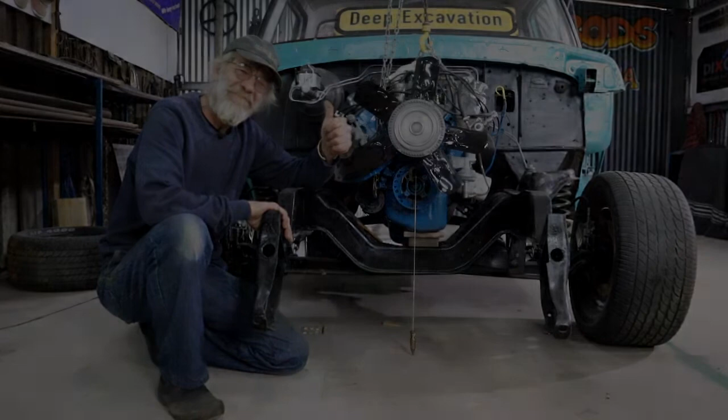Thanks for joining us. So in my previous video, I was establishing all these lines on the floor, reference lines, so that I could measure for proper engine alignment. Today, I would like to conclude that exercise so I can build my engine mounting brackets. I do need to ensure that my U-joint angles are within acceptable limits. So we'll be looking at that as well.

You might hear a little bit of rain on my roof. It's actually quite cold today. It's very strange weather for this time of the year. But nevertheless, I've got lots of energy, so let's get going.

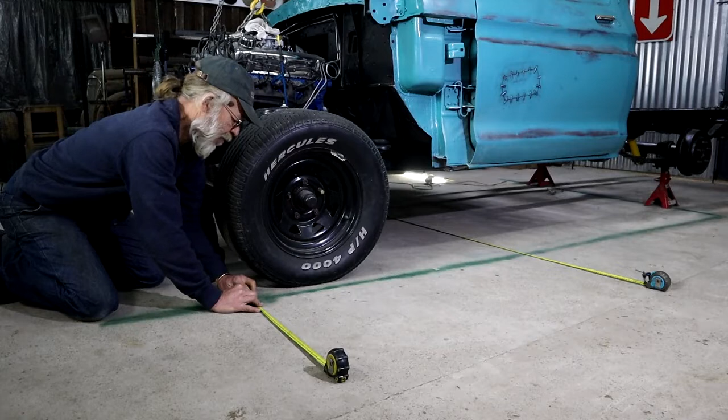Okay, and this one now measures 1101 millimeters. Yes, awesome. I've been crawling around on the floor for quite a bit now. Pushing the engine this way, pushing the engine that way, carrying on to get these two exactly the same. Tape measure in the back from the center line of the output shaft on the gearbox to my reference line. And then of course this one in the front from the center of the crankshaft also to my reference line.

I've now got these two measurements exactly the same. Whoopee. So that would mean that my engine center line is now parallel to my reference line. In case you're wondering, I did check these two tape measures against each other to make sure that they do read the same. You'll actually be quite amazed how tape measures can differ. They're not all to the same calibration. I mean, I've seen huge differences between tape measures. Back in the day when we used to build boats, we would all go to the shop together and then buy tape measures by checking them against each other so that we could all have the same measurements.

So with those two measurements the same, I now know that my engine center line is perpendicular to the axle. And I've currently got a gap here between the stock manifold and the steering box of about 6 millimeters, quarter of an inch. I do believe that's enough. If I ever want to change the stock manifold and go to a custom header, well then of course you can build it to suit.

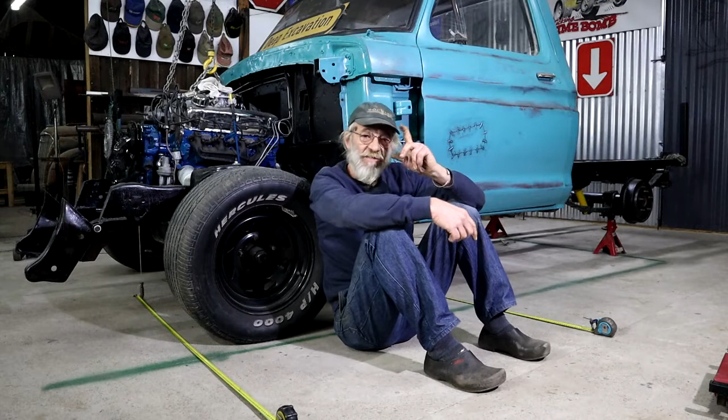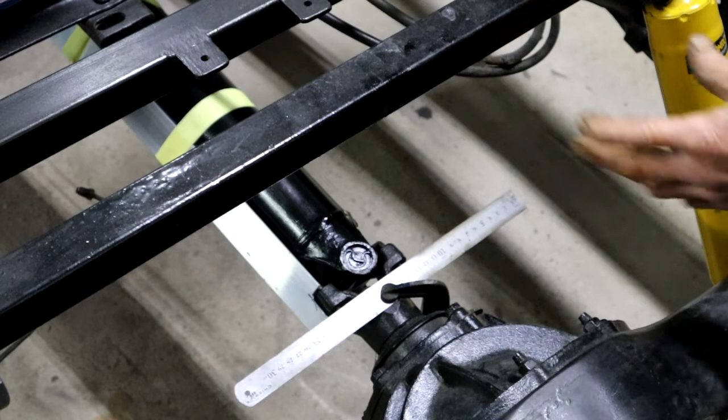Okay, so far so good, but now the golden question is this. What is the angle on the U-joint in the back? Is that within acceptable limits? So let's go and measure that. So yeah, it's a bit confusing with all the cross members, but hopefully you can see what I'm trying to show you. So I needed to establish some reference lines for myself so I can measure this angle on the U-joint. So the first thing I did was to clamp this piece of aluminium angle bar onto the prop shaft itself. In American, aluminium would be aluminum.

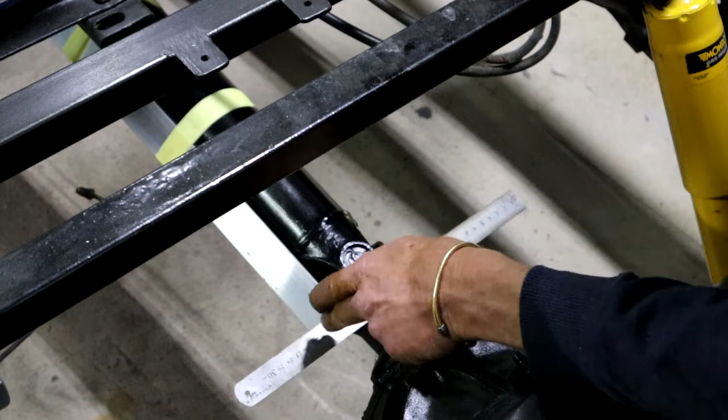So this gives me the line of the prop shaft. Then I clamped on this straight edge, the ruler here, onto the yoke. It is parallel to the machine surface itself. So now that I've got these two reference lines, I can measure the angle between them. So I've pulled out my trusty old protractor. Little bit rusty, little bit dirty, but it still does the job fine, just like me. So I'm going to now measure this angle best I could and see what I get with this.

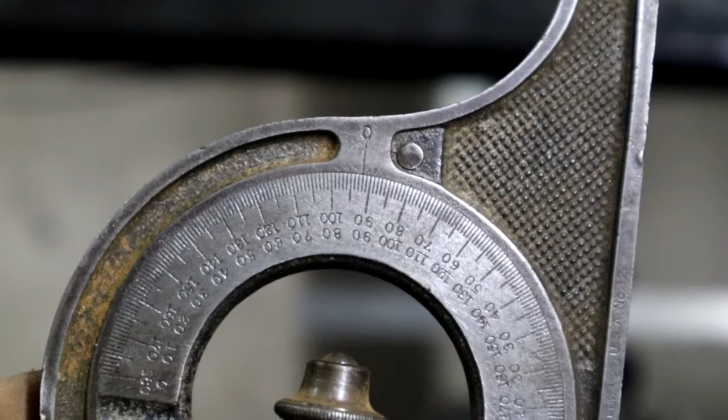I'm just lining it up by eye as best as I can. Okay, let me see if I can get the camera to focus on this. And then I will try and hold it as steady as I can. Can you see there? Shall we call it 2.5 degrees? It's a good number, I like that number.

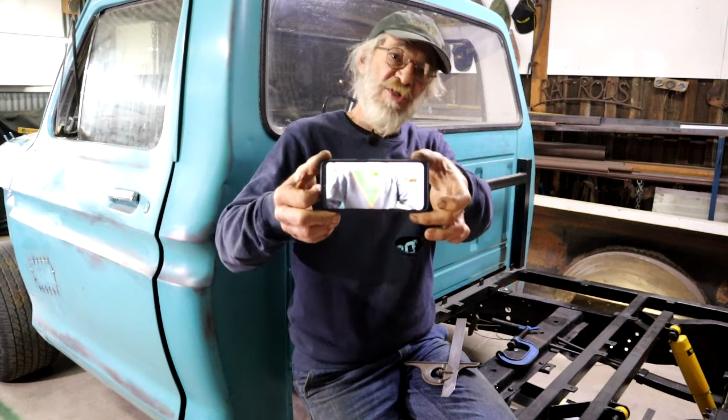So now, I'm sure some of you guys are going to say, well, how accurate can my rusty old protractor be? Okay, we can do the high-tech approach out here in the forest too. My clever daughter has downloaded an app on my phone. Let me show you. Where did it go? There we go. I don't know if you can see this. Check that out. It's like a fancy see-through protractor on top of the picture you see through the viewfinder. How clever is that?

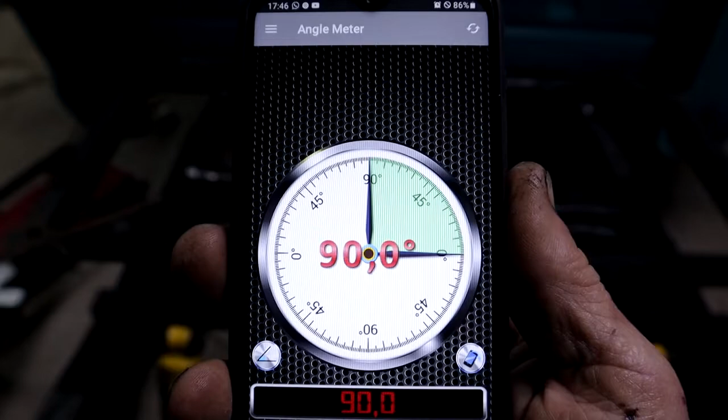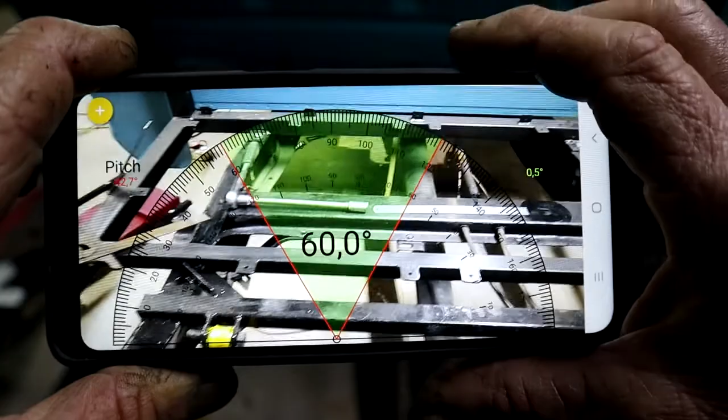So it's got different functions, and one of those functions is a protractor. Check how cool this is. Protractor, excuse my thick fingers, that's what I've got. And now look at that, isn't that awesome? So you can set the thing and measure some angles.

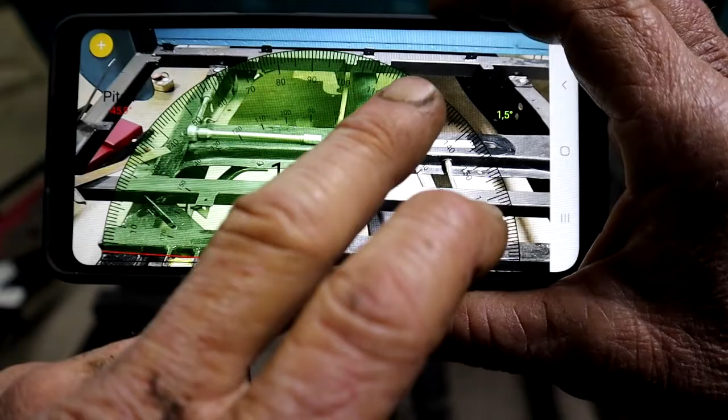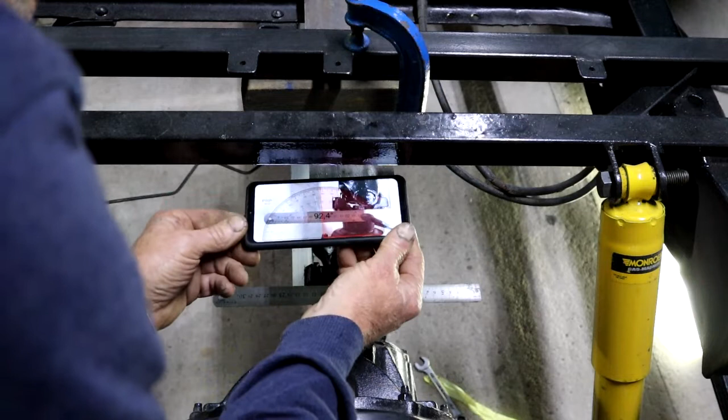It's got the roll and the pitch set you can set up. It's really great. So I'm going to try this on the U-joint. It's freaking impossible to hold the phone steady here to measure those angles. So I've clamped on this piece of plate. So now I can rest my phone on the plate and then line up all my edges so that I can take an accurate measurement. Let me show you a close-up.

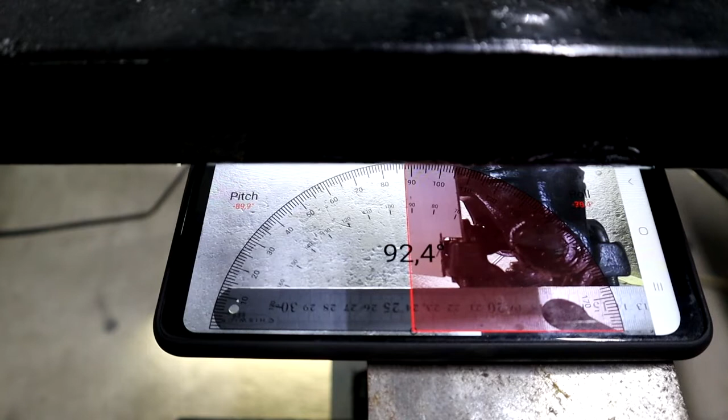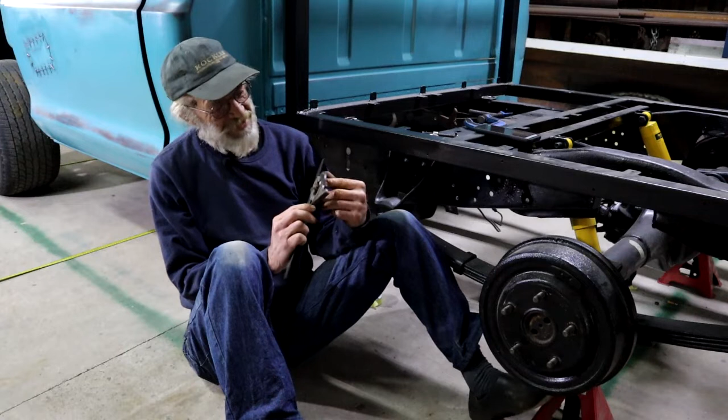Right, so the phone is as steady as I can get it. I've lined up my edges nicely and I measure 92.4 degrees. So the U-joint angle is 2.4 degrees. So my trusty old Starrett protractor, this thing has been with me longer than what my wife has been with me. And that's been a long time, so I know it very well. It measured, yes, I can't see, yeah, 92.5 degrees, we said, right?

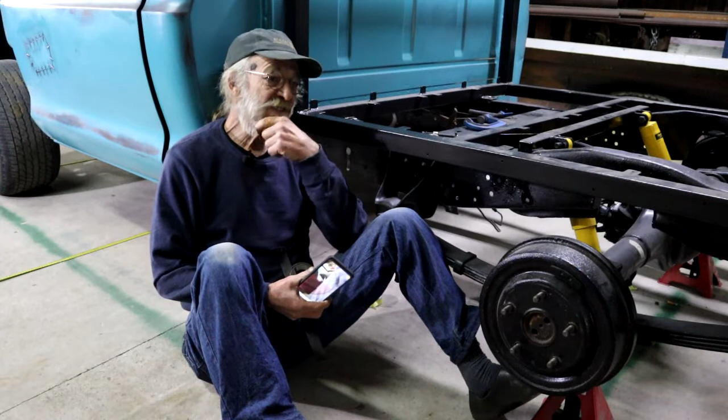The fancy modern app via my lovely young daughter measured 92.4 degrees. So yeah, this is not bad, eh? I mean, it's only out by 0.1 of a degree. Look, 92.4, 92.5. I think we can safely assume that that U-joint angle is in that region of about 2.5 degrees. So what does it mean? Let's go ask the clever people.

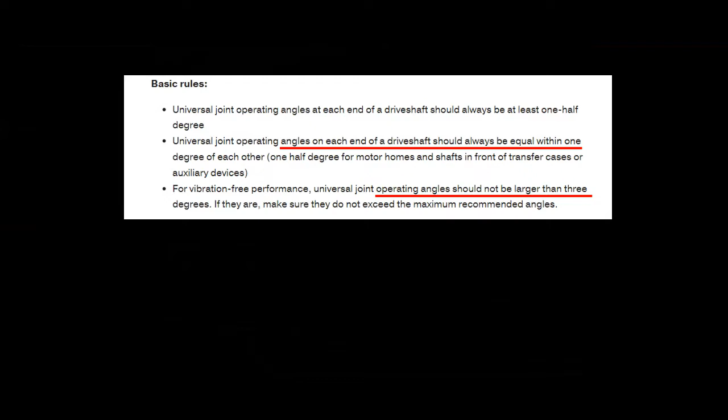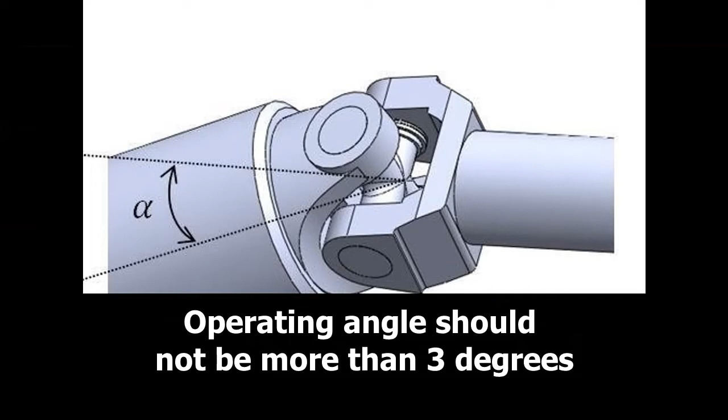To prove I'm not bullshitting you, I went to the Spicer Parts website where I found the basic rules with regards to U-joint angles. And here is the one that I'm currently concerned with. Operating angle should be less than 3 degrees for vibration-free performance. So that means I'm good.

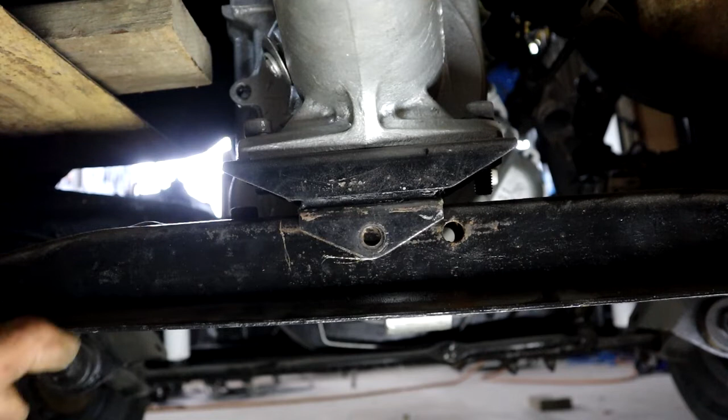Ta-da! Okay, back in here under the truck, I'm by the gearbox mounting. Here's the cross member. So with the engine moved over to the left, this is going to be the new location. So I need to drill a new hole here. I've measured the distance that it's moved across, and it measures exactly 46 millimeters if you want to be accurate. What is that in inches? It's a little bit shy of 2 inches.

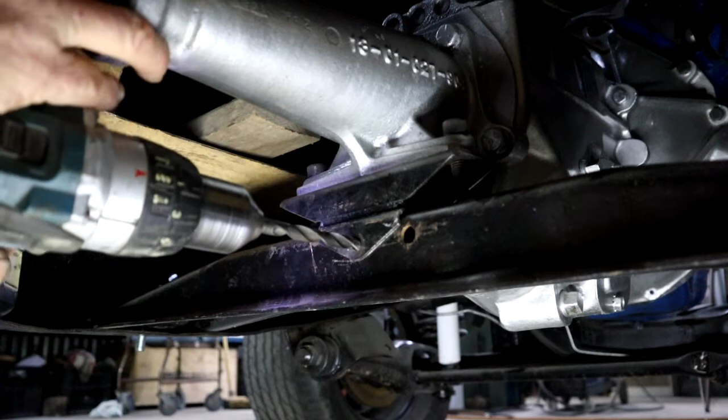So yeah, the fun now is going to be to drill this hole. I want to drill it in situ, and I've got to drill it through this side and the other side. That's going to be fun, but I'm not going to take the gearbox out or move it up or anything. It's staying right where it is. So let's give it a shot. I'm just going to slide away here on my crawler.

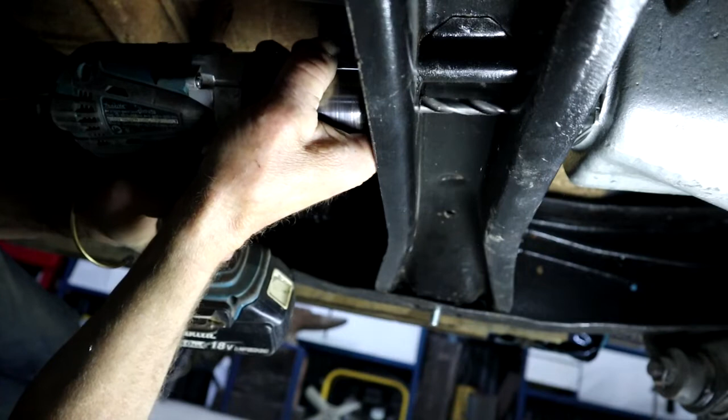That's through the one. I've still got to go through the next one. That's going to be fun because I need to somehow aim and make sure it all lines up. Right, I'm going to aim as carefully as I can, and then we're going to hope for the best. Right, got the 10mm drill bit through.

Okay, so here they've got a spacer piece. So I'm just going to have to do something similar. I'm just going to cut a piece of pipe that fits in here. The only purpose of that really is to prevent the bolt from closing this U-beam. So I'll just cut a piece of pipe that fits in there. Okay, here's my little piece of pipe. The ID is a little bit more than 10 millimeters or 3/8.

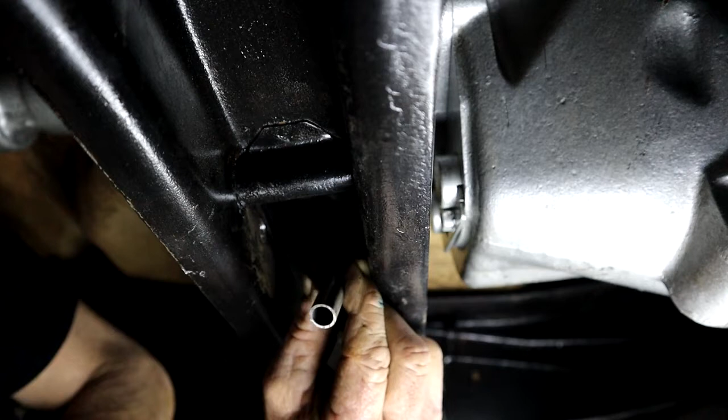I bought a length of this tubing quite some time ago, specifically for this kind of application. Yeah, it's proven to be very handy. I also bought a length with an ID of just over 12 millimeters, around half an inch, again for this kind of thing. So yeah, it's very handy to have around. So I'm just going to, there's a nice tight fit here. There we go.

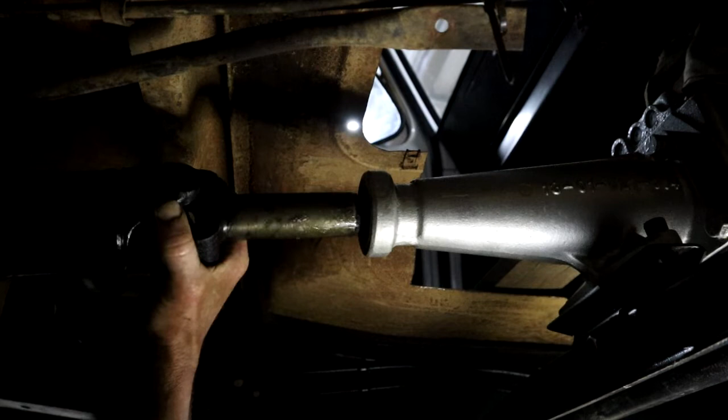The bolt is through. Yeah, of course you never have the right bolt. I'm going to need a longer one and a high tensile one, but at least now it's located, so the back end of my gearbox can't move anymore. Whoopee! It's secure, it ain't going anywhere. Let's get the old prop shaft back into place. Oh, that went nicely. Right, let me get my sorry ass out of here.

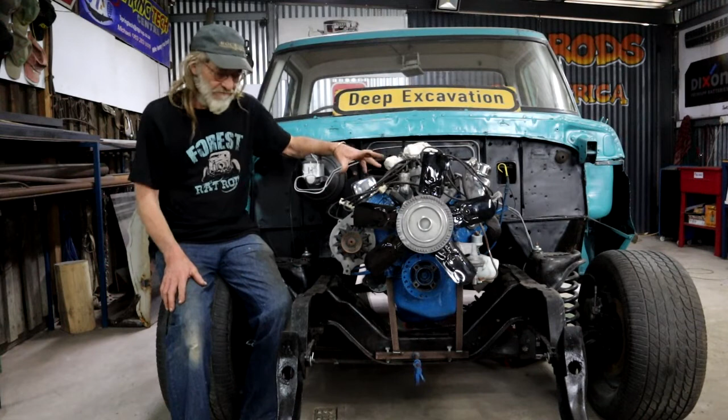I got tired of hoisting the engine with a chain block and messing around with blocks underneath to try and center it and position it. It was tipping and carrying on. So I built a sort of temporary cradle here, if I can call it that, to help me. Let me show you quickly.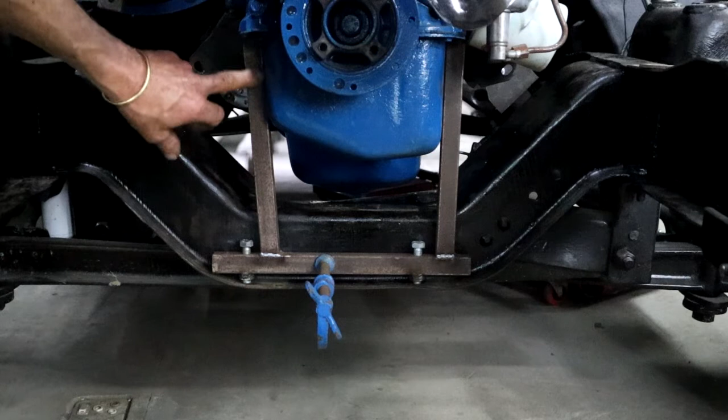And here's my contraption. The engine is actually resting on these two posts. And I've installed these bolts here. So by turning the bolts I can move the engine up, or you can even tilt it a little bit like this. So once I had this in place, I could now move the engine sideways a little bit until I had it centered. I can play with my bolts to level it in that way. I suppose you would call it the pitch.

And now I can still take it up and down to set my engine angle, which will be the next thing I want to do. If I turn these bolts in, I lift the engine up some, and vice versa. It's going to make my life a lot easier. It already is.

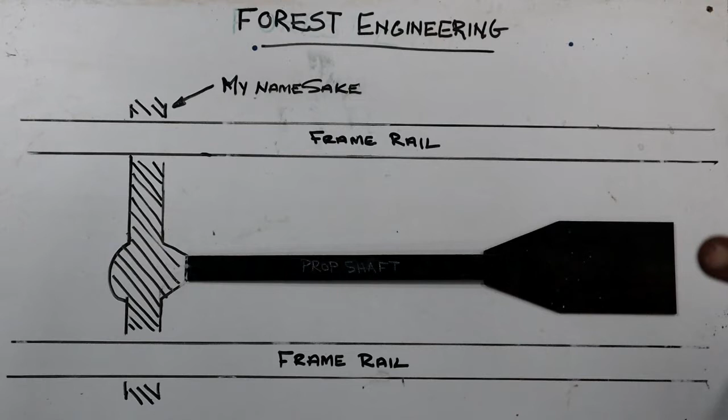Back to my drawing lying here on the floor. This is the DCAD version now, the dirty cowboy assisted drawing. We are looking at it from the sky, bird's eye view. We're sitting on Mars or somewhere up there. And this is what Mr. Ford designed: engine and prop shaft offset to the right.

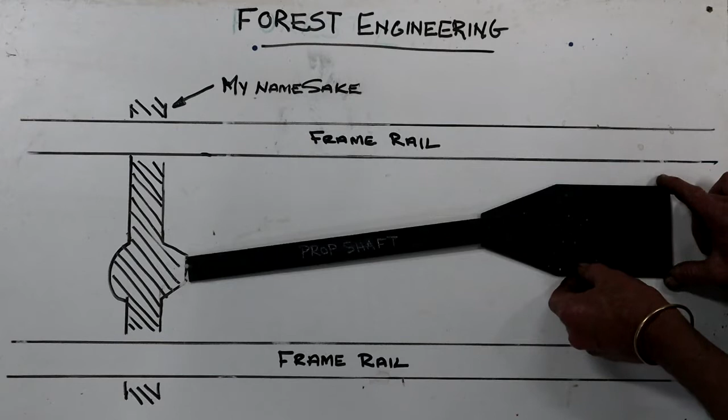What did I do? I moved the engine over that way. I'm exaggerating just so that we can see the effect. What are the implications of that? I've changed the angles on the U-joints there and there. What do the angles measure?

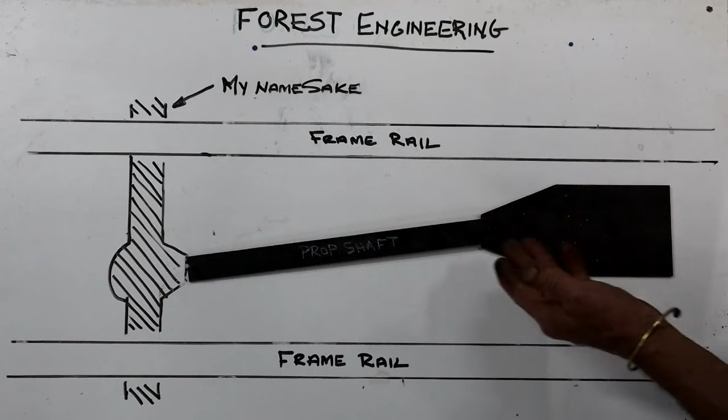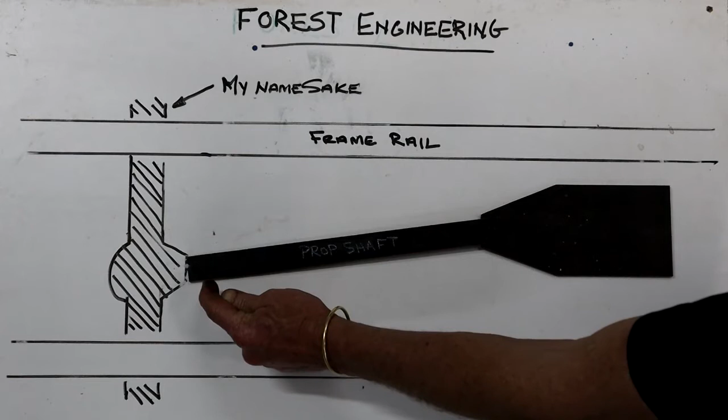Currently about 2.5 degrees. That's the angle between the center line of the engine and the center line of the prop shaft. 2.5 degrees here, 2.5 degrees there. That is completely within the parameters. The clever guys at spicerparts.com say stay under 3 degrees. So I believe we're on target there.

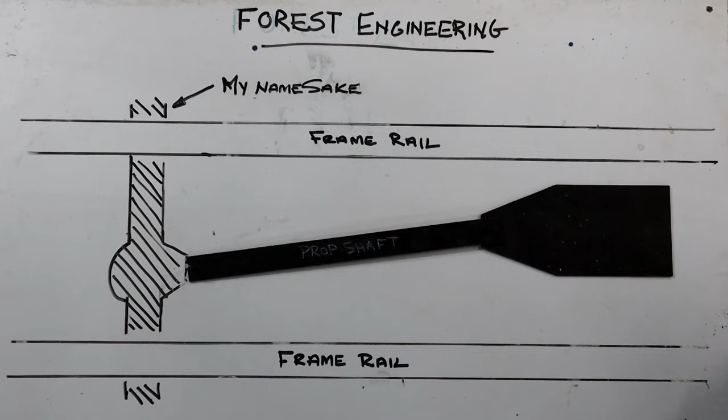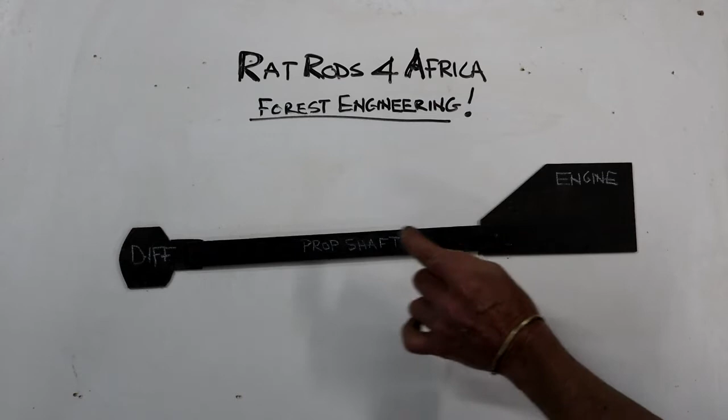Now let's look at this truck when we view it from the side to see what's going to happen there. Here's the side-on view. This point has now been fixed. You can still adjust the engine like that. We can still adjust the differential like that. So what I want to achieve now is to line up all three of these components as well as possible so that there's actually no angle change on these U-joints whatsoever.

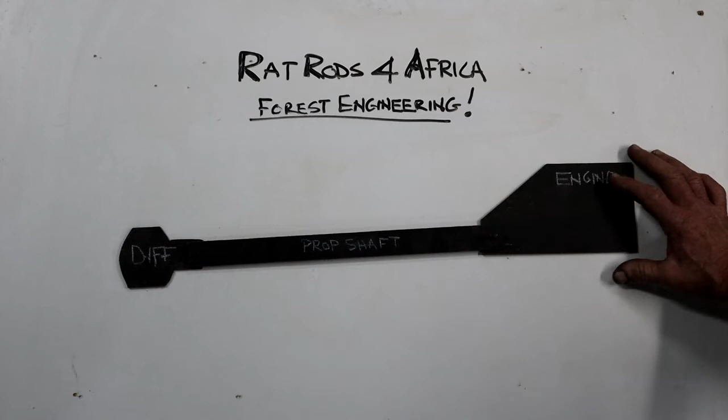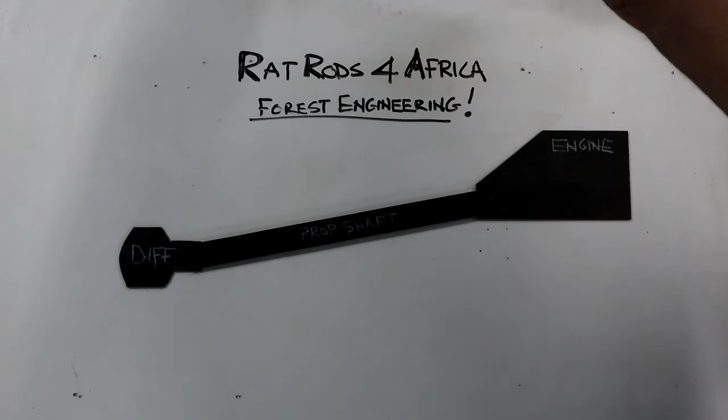So yeah, most guys would say that is not the way to do it. It's incorrect. You should have some kind of an angle change, something approximately like that. Yes, I agree in typical instances, but remember one thing, looking from the top down, I've already got an angle change on the U-joints. You do want an angle change of some sort, at least 1 degree.

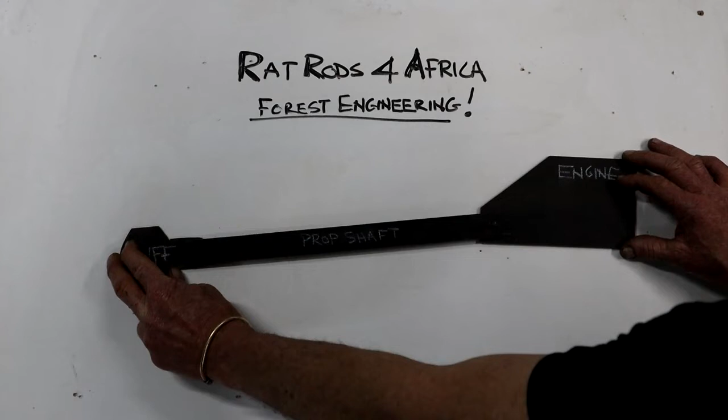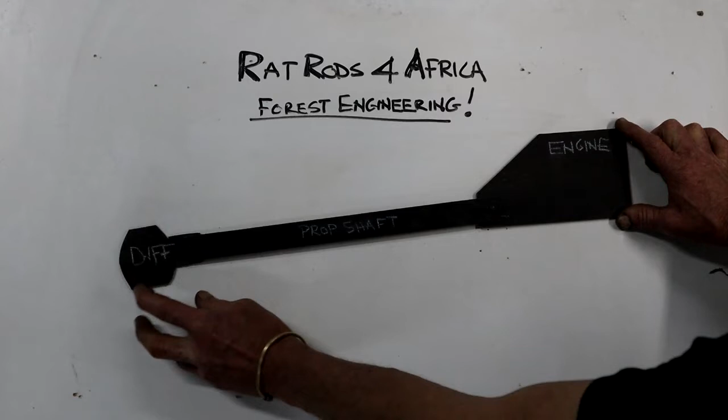So I want to actually change everything now and adjust it so that my three components line up as well as possible. So I'm going to measure the angle of the prop shaft, then I'm going to measure the angle of the engine, change the engine to match that angle, and then I can adjust the differential to have the same angle there as well. At that point, all three components will be the same. I hope it makes sense, but that's what I want to achieve.

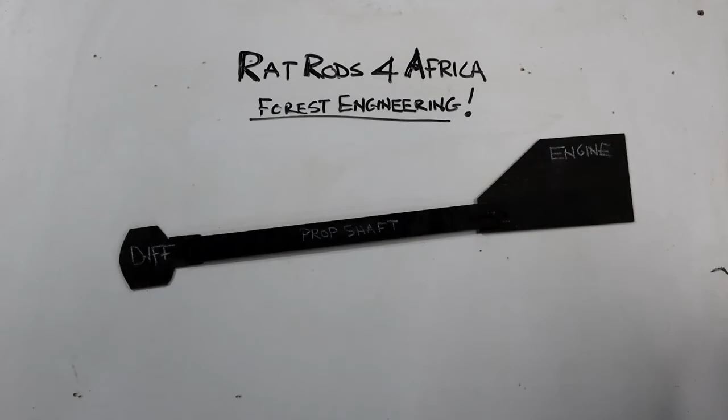Angle here, and angle here, exactly the same. I go through a suspension movement. Can you see what's happening? Only when I go into the suspension movement do I get a change of angle. I've got that angle looking at it from the top down in place already. So this change in angle combined with the top view angle will still only make one angle change, and I think everything will stay within parameters and the whole scenario will work. One way to find out.

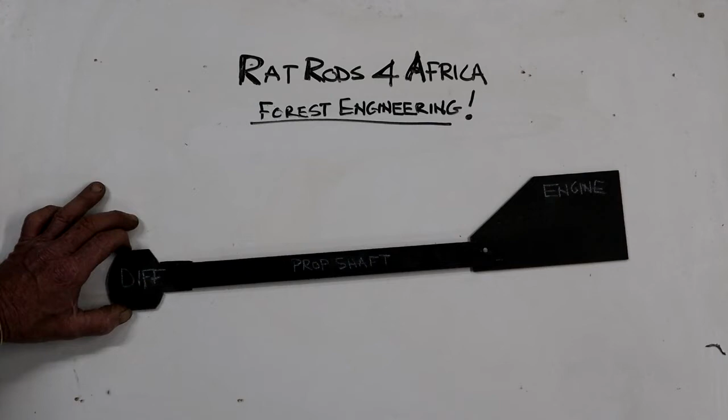Let's do it. Okay, here's Mr. Kennedy on my prop shaft, courtesy of that magnetic base. Let's go closer to see what that angle is. Okay, I see 6.5 degrees.

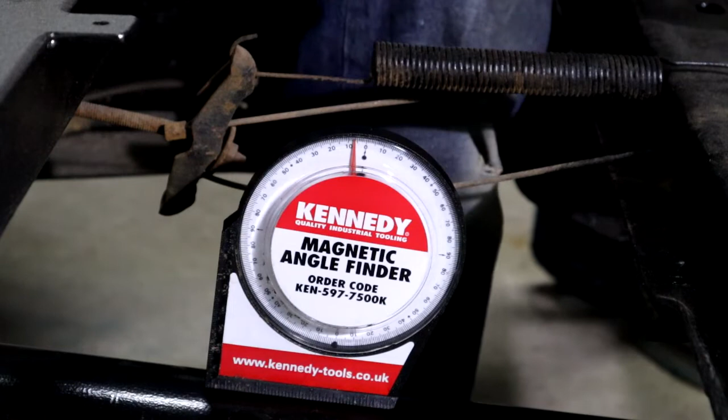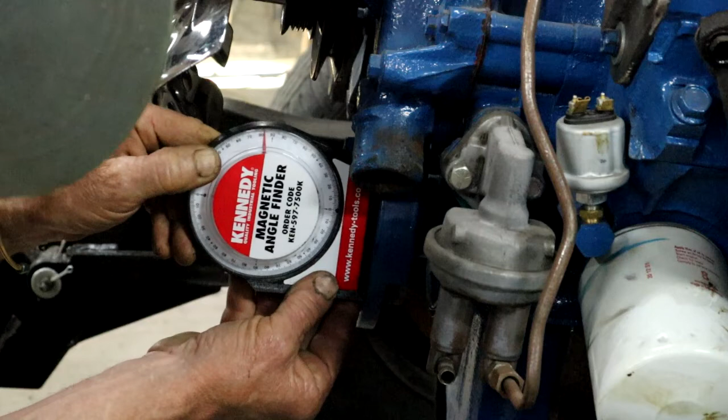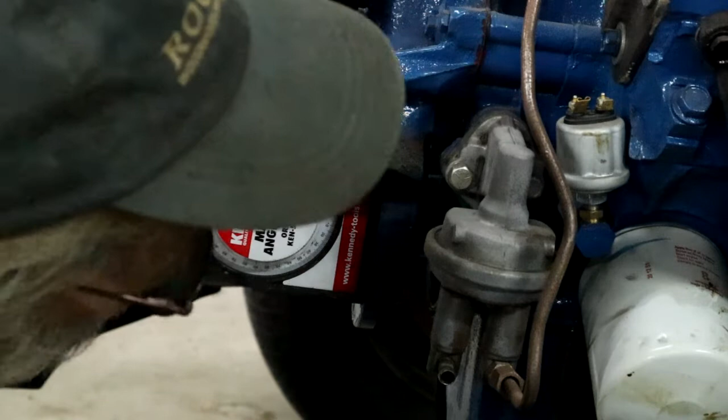The engine angle, I'm going to put my meter against this nice flat face here of this front pulley, and I'm going to use an old-fashioned angle finder with a magnetic base. There you go. I've given up on those smartphone apps. I tried it here and I kept getting inconsistent results, so they were not accurate for me. I'm back to old technology. I'm measuring here currently, yes, you can call it 6 degrees.

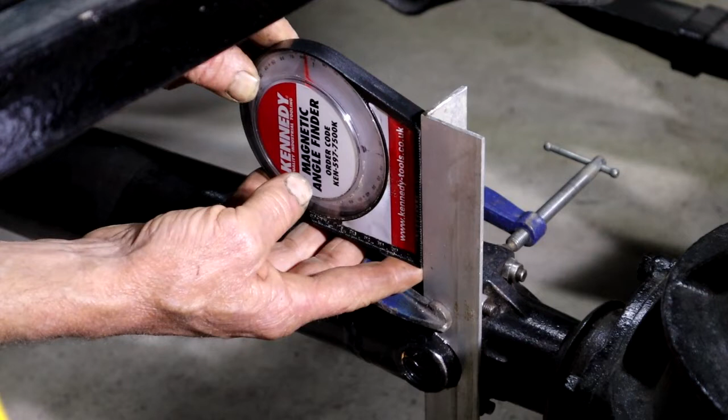And then we come to pinion angle, that word that everybody likes to throw around. So what I did here is I've got this piece of aluminum angle bar. It's clamped against the face of the yoke, so I can use this as my line to take a measurement. So I'm just going to put my angle finder against the top part of this aluminum angle bar. There. I hope you guys can see. Okay, and I'm just waiting for it to stabilize.

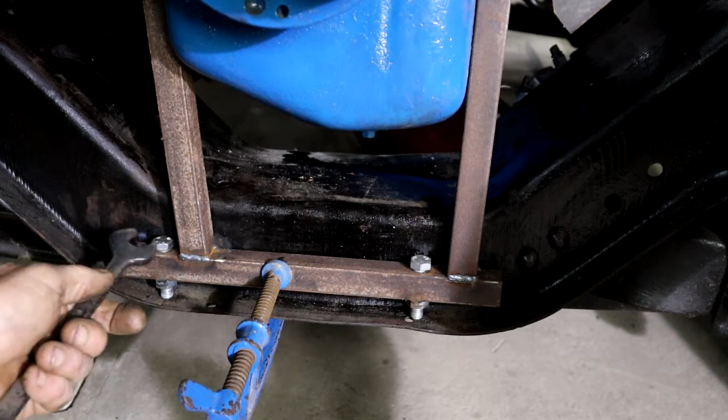And as far as I can see, it's 8 degrees. So my pinion angle is a little bit more than the other two, about 2 degrees. So that would mean I would need to rotate the differential a little bit down to match them. So now my cradle here allows me to adjust this engine angle. I would like it to match the prop shaft angle, so I'm just going to adjust it here until they are the same.

So I've got the spirit level lying across the tappet covers, so I need to turn each bolt the same amount to make sure that the engine remains level, if you know what I mean. As best as I can see, I'm sitting here at 6.5 degrees as well. So now engine angle is 6.5 and prop shaft angle is 6.5.

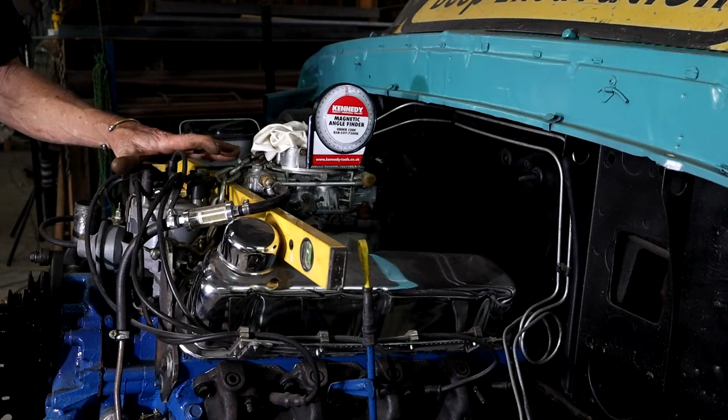So many sources say that engine angle should be between 3 and 5 degrees. So would that mean that I'm wrong? No, I don't think so. Actual engine angle is not that critical. It's much more important that the engine angle, pinion angle setup is done correctly.

Many sources also say that your carburetor should be level and the engine angles should be adjusted accordingly. Well, my carburetor angle at the moment is 3.5 degrees. So what does that mean? Does it now mean that my engine is not going to work if I drive up this long steep incline or up a hill or a mountain for a long time? No, of course not. It's really not that critical in my mind. I think I'm happy with what's going on here.

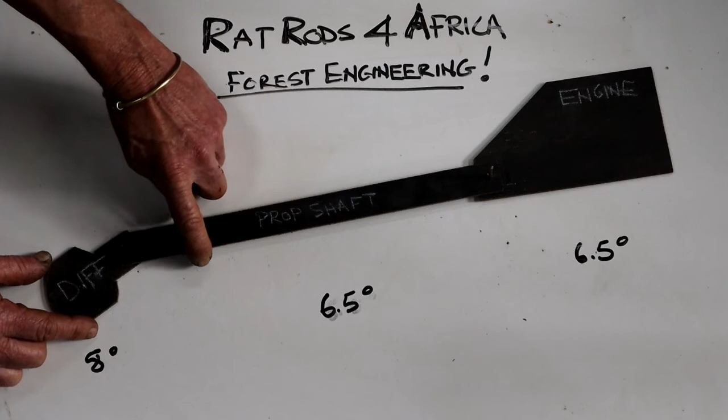I've also got a sneaky feeling that the front of this truck is going to drop a little bit more, and then that will just get better. So that's what we've got so far. I've exaggerated the pinion angle just for the visual. So what I have to do now to line it all up perfectly is adjust the differential so that this 8 degrees also becomes 6.5. So yes, my perch brackets are not welded on yet, so I can actually still rotate the differential until I get to 6.5 degrees there as well, and then I've got perfect line up.

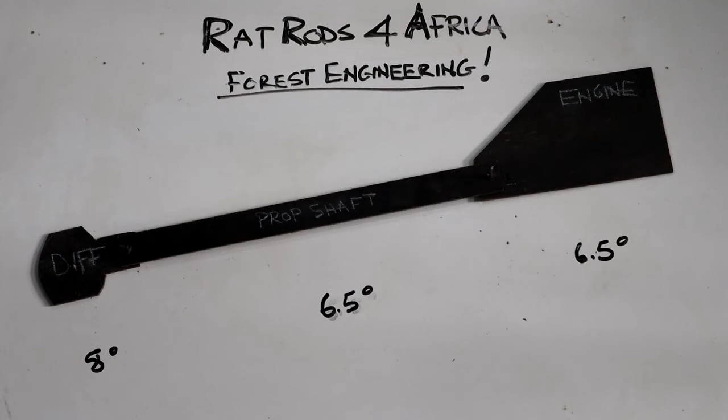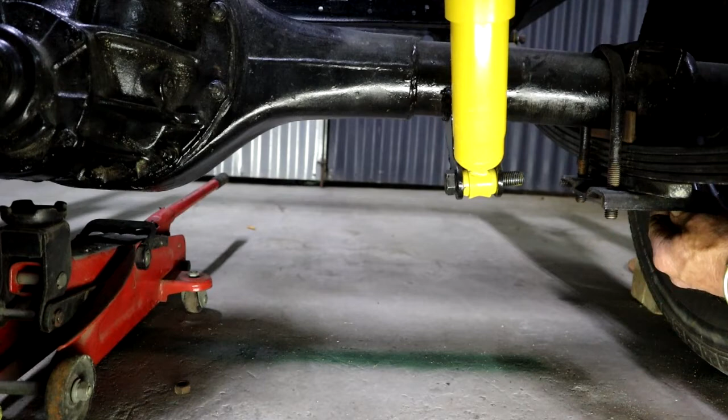Remember, I do have that 2.5 degree offset if you look at it from the top, which means undoing the U-bolts here just a little bit, and then I can push the diff down. I've got a jack there to stop it so it can't go too far, and I can always jack it up gently to try and get it into its correct spot. Okay, it's a bit awkward to film here, but I'm going to try.

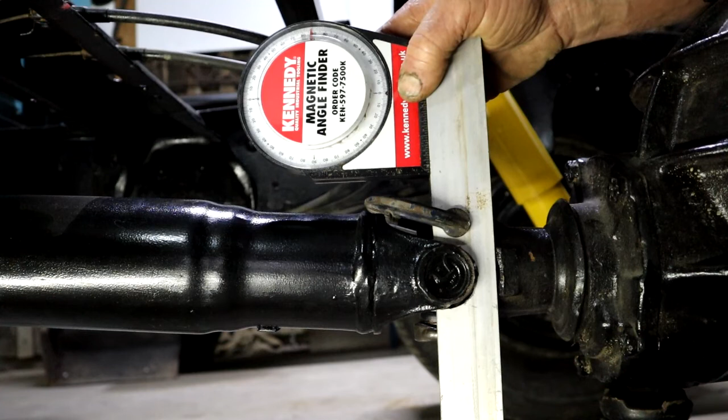So I managed to rotate the diff some. So currently you can see the angle is just a little bit more than 90. I've got the front of the differential sitting on my jack. So as I jack, it should change. Can you see the angle changing? What are we at now? From here it looks almost like 6. I must just check a little bit better. And you probably can't see it on the camera, but it's currently sitting at about 6 degrees.

Awesome. Now I'm going to tighten my U-bolts again. No, I'm not. I was lying. I'm not going to tighten those U-bolts again. I'm first going to check my other angles one more time, the one here on the prop shaft, and then the one on the engine. So now I've got the pinion angle at 6.5 degrees as well. Awesome. 6.5, 6.5, 6.5. I've got good line up.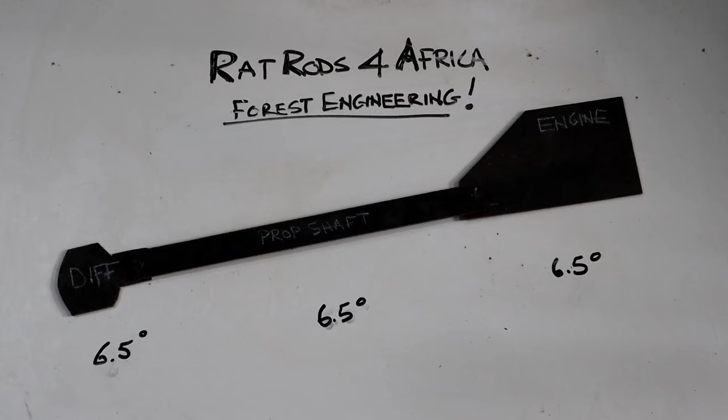Am I done? I've got a sneaky feeling I'm not, because there's one thing we need to keep in mind when we do all of this. The truck has to sit at ride height. Am I at ride height? The load bin is missing, that weight of the load bin. The weight of the front end, the nose, the body panels up there is still missing. So if we assume that those two weights are the same, it won't change much. But I've got a sneaky feeling that I'm still going to be messing with my front springs to drop the front of the truck a little bit more.

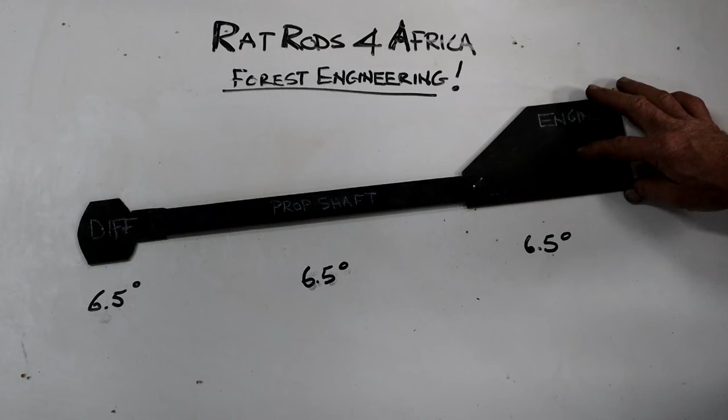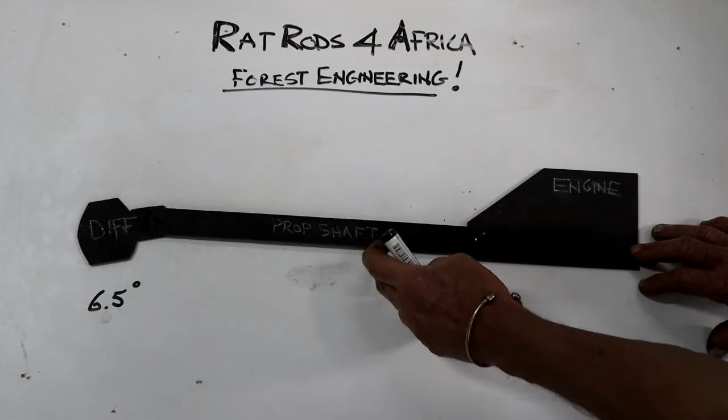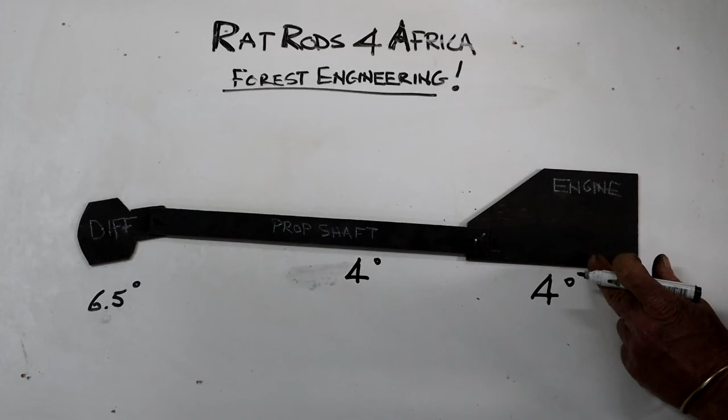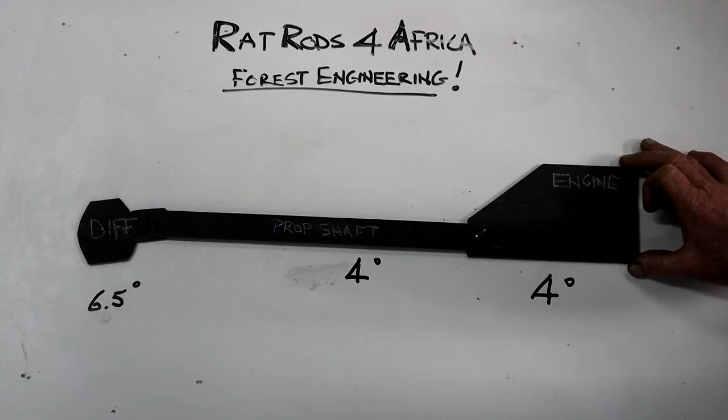What's going to happen if I mess with the front suspension and the front suspension drops while the back suspension stays where it is? Remember, I'm attached to the frame rail here, so if I drop the front, that's going to happen. Not so. This is going to change now. These two angles will remain the same. Who knows what that might become, but let's just say for the argument it becomes 4. This one will also then be 4, because I'm attached at the engine mounting brackets. I'm attached here by the transmission. This movement, let's get rid of that. You know what I'm saying. So we might end up with something like that.

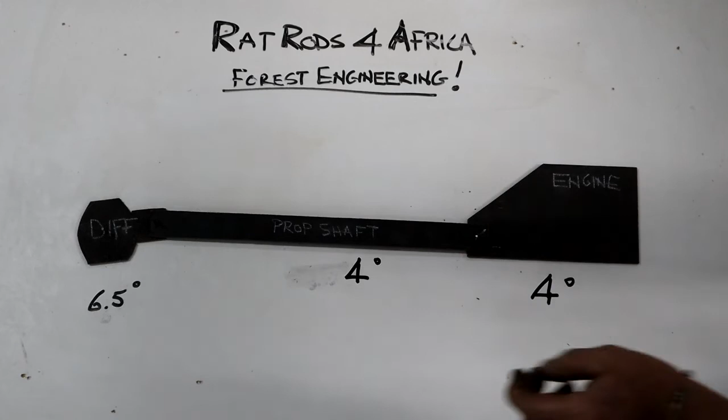So I'm not going to weld my spring perch brackets yet. Only once I've got all my final weight in place and I'm at my happy ride height and happy with the stance, then I might want to just change that differential a little bit. And then I can finally weld those spring perch brackets.

So now finally I can build my engine mounting brackets. Everything is now tuned up and measured and locked in place, and I've got little cradles holding it, engine angles, pinion angles, the whole journey. But now I can finally do these. I've got some clearance here between the manifold and the steering box. It's about 1/4 of an inch. I think that's acceptable.